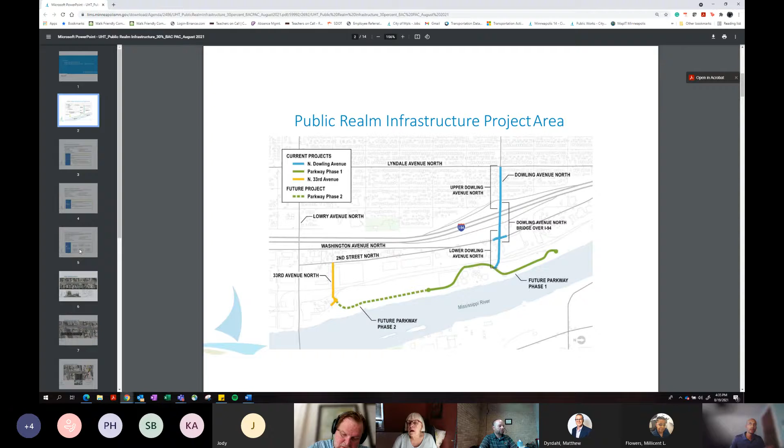I'm going to skip the engagement slides because I kind of just talked through that. Those are there if you want to review them. You all have this presentation. I'm just going to hop into Upper Dowling.

So this is kind of the first piece of infrastructure. We call it Upper Dowling because it's on the western side of the bridge. It's at a higher elevation. This is the intersection of Lyndale Avenue North.

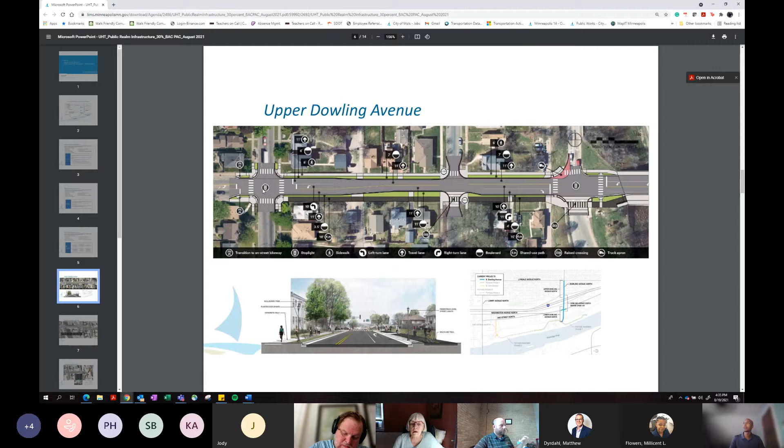You can see that we have a shared use path treatment on the south side of the roadway, 10-foot width. We have 2 vehicle travel lanes. This says 11, they're actually 10-foot travel lanes, so I apologize for the graphic error. Tight timelines, trying to get things to you as soon as possible, but these are 10-foot travel lanes. We also have a 6-foot sidewalk.

We have some nice boulevard. If you've been out at Dowling now, you know it's face a curb and the sidewalk. There's no boulevard. There's bike lanes in the street and they're just painted on the roadway. This is a high volume roadway, about 15,000 vehicles a day.

And so in those type of situations, we'd like to separate motorists from cyclists, and our design does that. We are sharing that space with pedestrians. The reality is we have a really constrained right of way.

In certain situations throughout the city, when we don't have enough space to separate bikes and pedestrians, we combine them as a shared use path.

This is a similar treatment to what's on 26th Avenue North, about a mile and a half south, extending from the Mississippi River overlook all the way to Theodore Wirth Parkway. We're also planning to extend this treatment in the next 10 to 15 years through our CIP cycle as we continue to reconstruct the rest of Dowling, so you'll have a really nice east-west connection across this section of Minneapolis.

We also have a bump-out here, and there'll be a transit pad located here. We have raised crossings here and here. This, which we're working with MnDOT very diligently on, would be the first ever raised crossing on a MnDOT facility, so it's a really exciting endeavor. Chris has really been leading that design and can talk through some of that in further detail. Chris, you want to provide a little context on that?

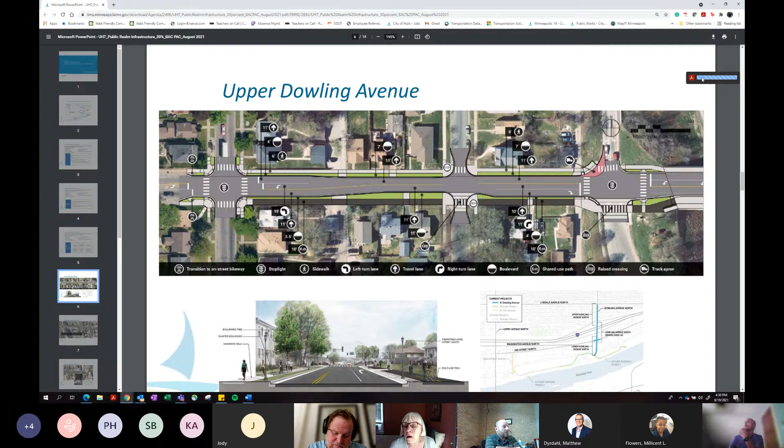Another feature at the ramps, on the north side of the road, you can see that pink area - that's intended as a raised truck apron. It does kind of the same thing: we're attempting to slow down vehicles coming off those ramps and turning onto Dowling, to try and reduce the likelihood of a pedestrian crash at that location. So two kind of innovative treatments we're working through with MnDOT.

Looking forward to what we come up with there. Thank you, Chris. I'm going to slide into the bridge. Does anyone have any questions on Upper Dowling? Okay, we'll keep moving along.

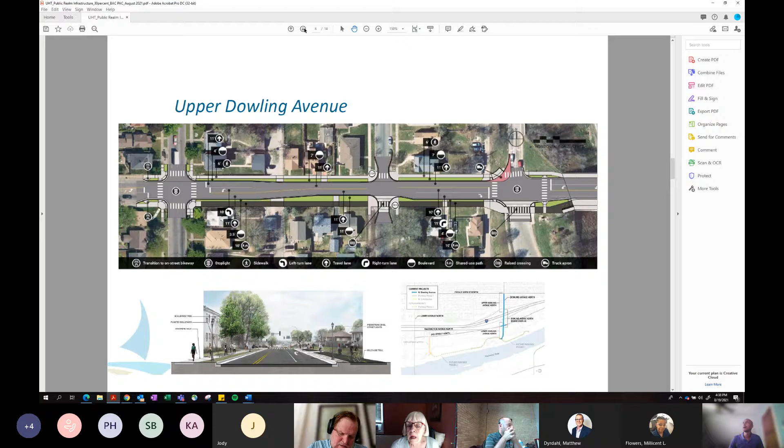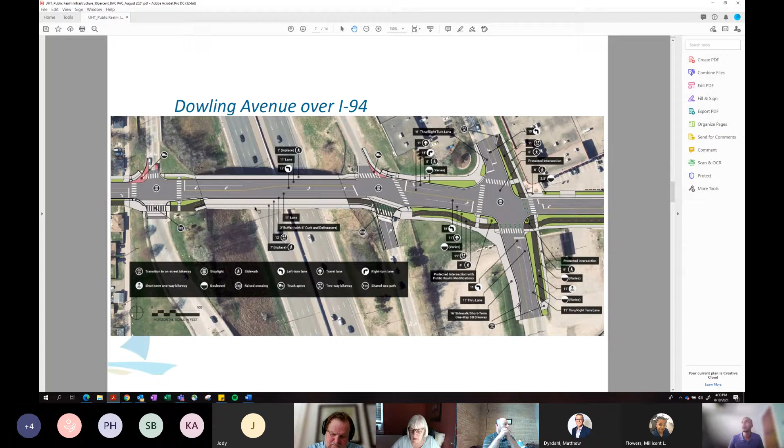So we're keeping the northern sidewalk in place, and we're also keeping the southern sidewalk in place. Those are both 7-foot sidewalks, and we're adding in a two-way cycle track here, on slide 7. This is going to be 12 feet of width. We're also proposing a 2-foot buffer with a 6-inch curb and delineators. This will also be a first on a MnDOT facility.

So as Chris alluded to with the raised crossings, we're also working with MnDOT on adding in that raised curb, because this would be a first on a MnDOT facility. There's quite a bit of design detail to work through, but it's a design that we are recommending and hoping to secure an agreement with MnDOT on that treatment type.

So this is the start of where you begin to see the separation of cyclists and pedestrians. Like I said, when we can, we like to separate them, and in this situation we have the space to do so. So we have a 12-foot two-way cycle track and a 7-foot sidewalk, and this treatment generally continues all the way east into the site and is pretty consistent throughout the parkway as well.

We also have a raised crossing section here on the other side of the bridge that Chris is continuing to coordinate with MnDOT on, and you see this two-way cycle track continuing east into the site.

A few things to note on Washington: if you've been on the northern part of Washington, you know there are one-way bike lanes in each direction, but they're just painted with no physical separation. So we're going to have this two-way bike facility here, and we're actually going to work with the county to repaint this northern section of Washington so they'll have a two-way cycle track on the east side of the road.

They're going to put in bollards and continue that treatment all the way up to Lyndale, to the Webber Camden 44 project, so we're able to connect this facility all the way north to provide more regional connectivity for our cyclists.

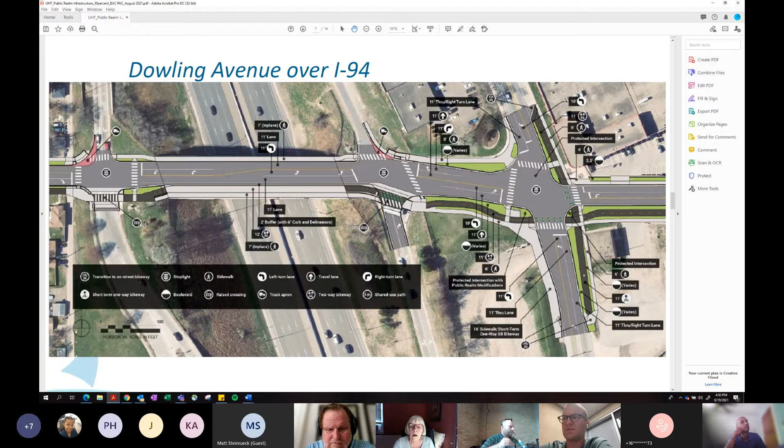That's a really good question. To explain a little more what I'm getting at: whenever we have a crossing, we need a level landing ahead of that for the curb ramp. So if we were to add a second curb ramp crossing the road, we'd need another level landing. The difficulty is getting from that second level landing back up to the bridge while having an ADA-compliant grade in between. To accomplish that, we'd have to do a little zigzag in the entire sidewalk for everyone, trying to get back up to the bridge grade while still maintaining ADA-compliant slopes along Dowling.

If that makes sense—I'm sure it does, but I'm not following it. Are you talking about the south side, the landing there, for example, where the stop bar is?

On the south side, actually, we've got more length, so we have longer room to chase that out. It's really the north side of Dowling where we have issues. So if the stop bar was a crosswalk, the landing area at the stop bar on the north side is what prohibits it—there's enough of a gradient just in that 7 feet or whatever the crosswalk would be.

Yeah, if we were to attempt a second landing for the movement across Dowling, that flat area would make it impossible to get back up to the bridge without doing some kind of circuitous design with the walk along Dowling. That's what we're up against. Okay, alright, thank you.

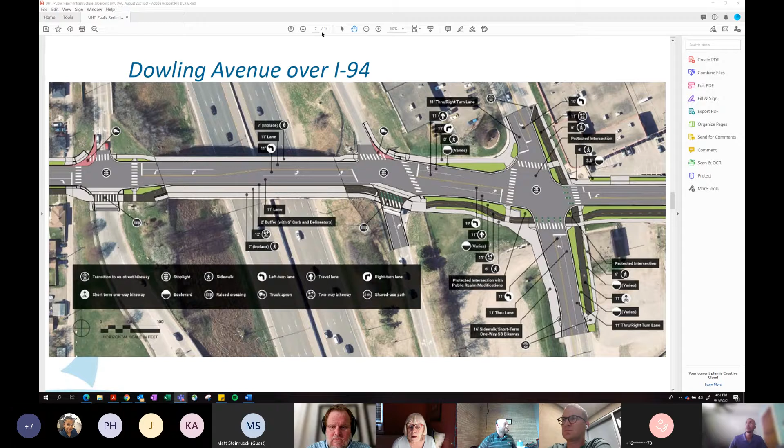I'm going to move on to the next slide, which is slide 8, Lower Dowling. This is just east of Washington. This is the formal entry into the site.

In this you'll see the continuation of the two-way cycle track, some boulevard space, and a sidewalk continuing as well. There are 2 active rail crossings here, with frequency about 4 times a week, so there'll be active gate warnings extending across the roadway and the bike ped facilities.

We have 2 medians in here as well in the roadway, to prevent motorists from attempting to drive into an alternative travel lane to get around the gate arms and bypass the train.

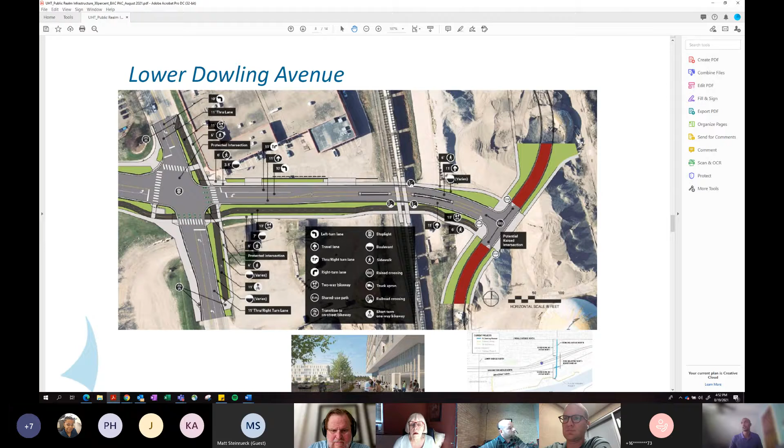We also have the entry into the site, and you'll see a potential raised intersection we're pursuing to really provide design cues to slow vehicle speeds at that critical intersection as folks enter the site.

The parkway extends north and south here - this is the starting point of the parkway. The illustration at the bottom shows that two-way cycle track with some boulevard plantings adjacent to the proposed development.

Does anyone have any questions on this piece? This is the last section of Dowling before we get into the parkway.

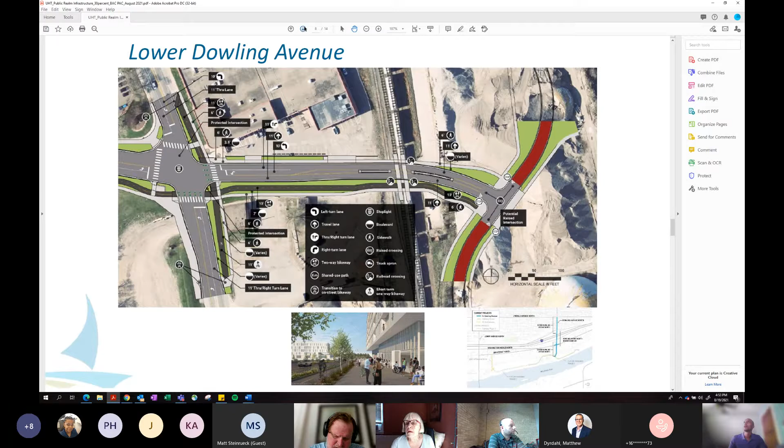Okay, now I'm going to get into the parkway. I apologize, the slide order is a little off - I'm going to come back to 33rd because I know this is a really popular discussion piece at our last meeting. So I'm going to go into the parkway and then we'll come back to 33rd.

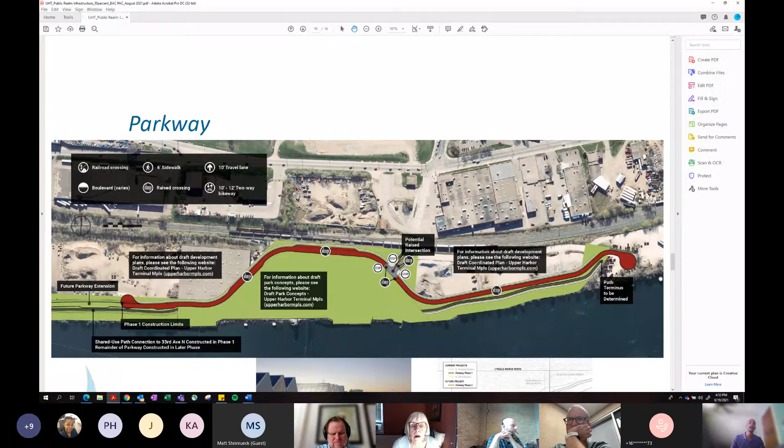So we're on slide 10 now. If you have the deck, you should be on slide 10. This is the parkway - this is the raised crossing, and then we're entering into the parkway. The color is a little more red than you'd typically see, but when it's actually implemented, it'll resemble that red granite chip seal you see on all the parkways in the city.

We're going to have 10-foot travel lanes in each direction. You'll see a sidewalk that continues, a bike trail on the south side, and then a trail as well. This will continue through the park.

The park board just has not finalized their concepts for the parkway or for the park yet, and so we left this area a little blank just because we're still waiting on that process. We're a little ahead of them.

There will be parking within the parkway. We haven't finalized that number, but it's going to be something in the couple dozen range at these little park bays you see along the parkway. Typical with a lot of the parkway facilities in the city, but still a very low parking volume.

This concludes phase 1 right here, which will be right adjacent to the concert venue.

We're also working with Metro Transit to ensure that the parkway can accommodate Metro Transit buses for layovers, turnarounds, and stop locations. It's an ongoing discussion in terms of where they will actually be, but we've been very engaged with them so that when transit does come to the site, it's already integrated into the design and we're not having to backtrack things.

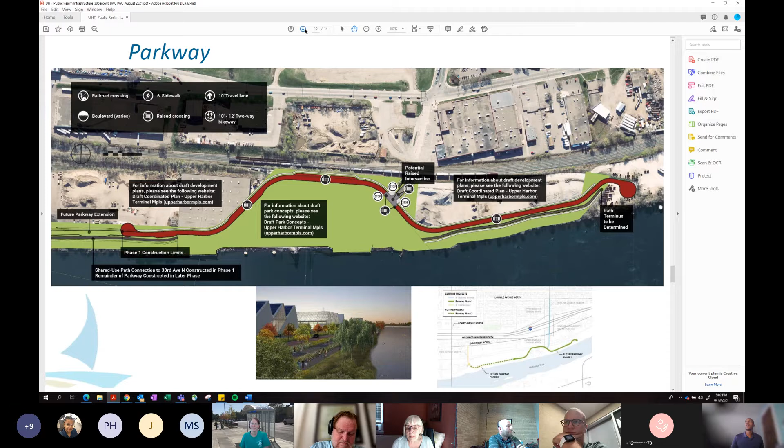All right, I'm going to skip to slide 9, 33rd Avenue. Slide 9 in your deck. I apologize for the order confusion.

This was a pretty controversial topic when we last met with you all. We showed you just 33rd because we knew we wanted to get feedback from you all. We had two options: one was this option, and then one was without a sidewalk. So this option has the sidewalk.

It also does expand the roadway width. The original design we had was more narrow. We went out there and physically painted the roadway and kind of saw what was occurring, and we just realized that it really wouldn't work.

So the effective roadway width here is 32 feet. That is the same as the effective roadway width today when the south side of the street is parked with vehicles, which it normally is. So the effective roadway width remains unchanged relatively.

What is changed is the addition of a sidewalk on the south side. There was no southern sidewalk. What is new is the addition of a shared use path on the north side. There are no bike or ped facilities on this entire stretch. So this is what you see here.

There's also a roundabout here to facilitate vehicle movements. This was a challenging design. There's a lot of vehicle activity. There's no bike ped facilities. It's a really constrained right of way. It's the only option we have for a secondary access to the site. So it's challenging, I'm not gonna lie.

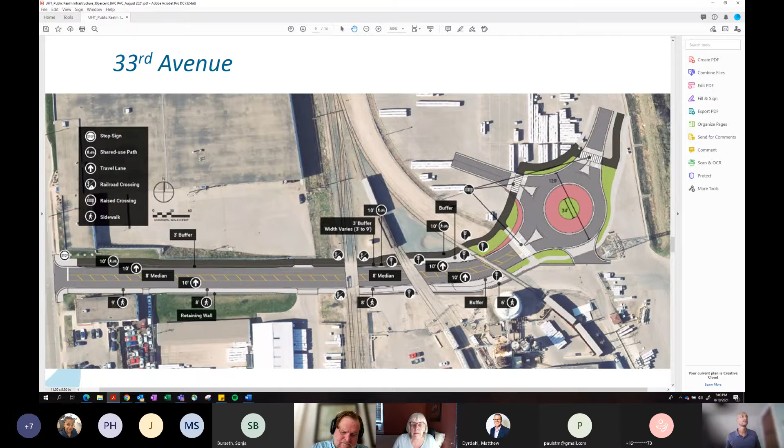Next up, we have Minnehaha and 50th with Madeline Hudick from Minneapolis Park and Recreation Board.

Hello. Like Jody's got the presentation up. Jody will be presenting this evening. She is working on the project with me. Okay, I'll hand it over to Jody. Thanks, Madeline. Hi everyone, I'm Jody Rader. I'm with HKGI, and we are working with Stantec along with the Minneapolis Park and Rec Board on Minnehaha Parkway Regional Trail implementation projects.

So today we'll do a quick introduction and then go over a quick overview of the master plan that was recently completed for the full parkway, and then we'll get into the primary project area, which is the intersection improvements at 50th Street and Minnehaha Parkway, and then talk about next steps.

So like I said, I'm Jody Rader, a landscape architect with HKGI, and we also worked with the park board on the master plan process. And then we have Madeline Hudick, and is Carol on the line as well? I don't. Oh, we also have, I'm Carol here. Yep, I'll be taking notes today. Awesome, also from the park board. So Madeline and Carol, if I miss something, please just interrupt and jump in. I can't really see your faces.

So we'll quickly go over the master plan process. The Minnehaha Parkway Regional Trail Master Plan was completed in November of 2020. This process started in April of 2018, and we had a pretty robust community engagement plan and implementation throughout the planning process, with quite a few options for online engagement. We also had a community advisory committee where we held a dozen public meetings, as well as a number of open houses, MPRT in-houses, web surveys, neighborhood meetings, site meetings, et cetera. So we feel like we had a pretty robust community engagement process throughout the plan. Right now we're working on implementation of some of the initial projects identified in that plan.

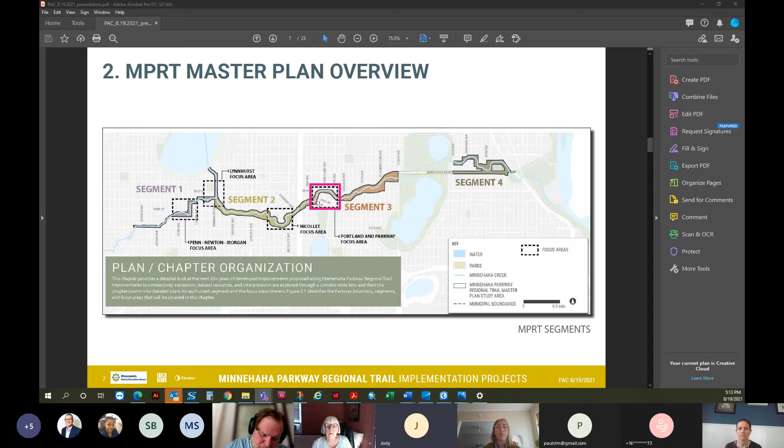In this area, we collected quite a few comments throughout the engagement process about the state of the trail, sight lines, and ability for people to cross roadways. There was a lot of concern about safety for pedestrians and bicyclists, especially at Portland and the Parkway and at 50th Street and the Parkway, where the Parkway bends around a corner.

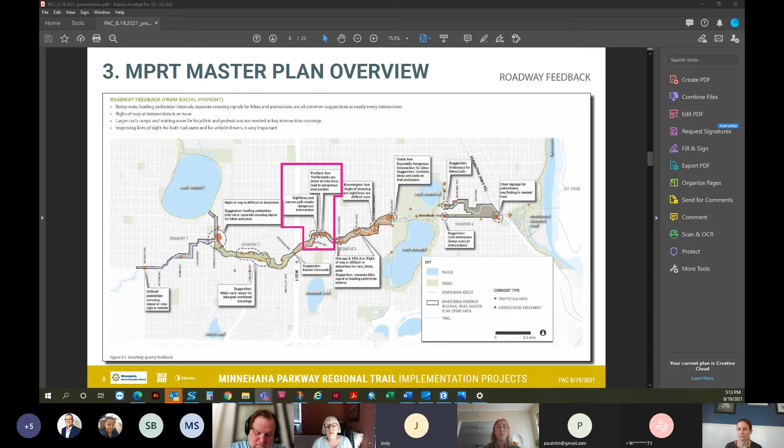About two-thirds of the way through the planning process, it became apparent that we should pause and engage a traffic study in order to get a more accurate count of pedestrian, bicycle, and vehicle movement throughout the study area, and to model some ideas about potential improvements.

At this particular intersection, we looked at what the outcomes would be if a 3-way stop-controlled intersection was constructed here. Today, there's only a stop sign for eastbound traffic coming off of the 50th Street Bridge. If you've ever used the Parkway, you probably know this intersection well, because it's dangerous, and there are a lot of near misses because vehicles don't necessarily understand who has the right of way and when to stop.

So this traffic study modeled what it would look like if this intersection had a 3-way stop, and the outcomes showed that with the combination of the traffic lights at Portland Avenue, there would be some backup of traffic along the stretch, but it would not be an adverse effect overall. It was recommended through the planning study to move forward with creating a 3-way stop here.

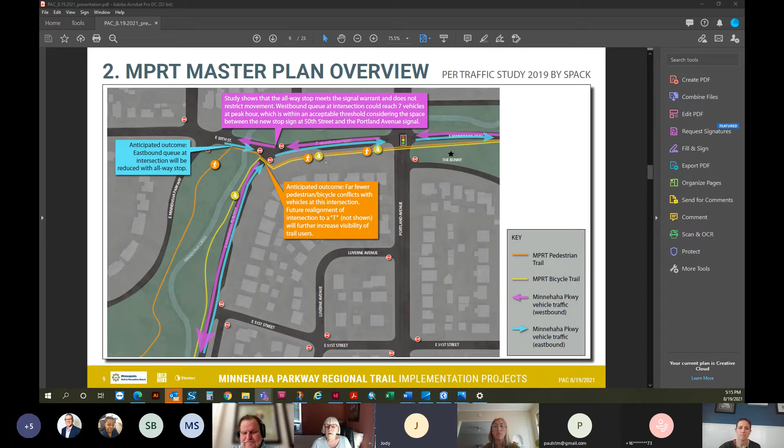This is the master plan of this area that includes the 3-way stop at that intersection, as well as showing a realignment of the roadway here to better tee up the intersection. I just want to note that the pedestrian path for the parkway is in orange, and that continues across this intersection, across the bridge, and then the pedestrian path is on the west side of the creek here.

The bicycle path is shown in yellow. This is a shared use path between Portland and 50th Street. After crossing 50th Street, the bike path splits and goes south along the east side of the creek.

There were many other projects identified in this area: some bank stabilization, other sidewalk improvements, curb extensions, looking at potential realignment of some other intersections, and integration of medians. Also looking at some opposing one-ways to curb some cut-through traffic that happens along this north leg of the parkway.

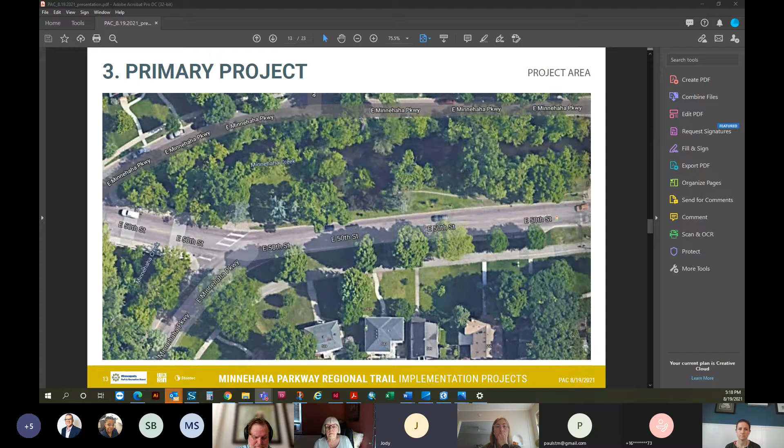This is the project area. I just threw these slides in here in case we need to come back to them for reference during discussion. This is the intersection that I'm sure most folks are aware of if you've ever used the parkway. This is looking west towards 50th Street, and the parkway bends to the south here.

The pedestrian and bicycle crosswalk is here. Obviously folks are using this north side of the parkway to get to where they are going, and there's not a sidewalk there today.

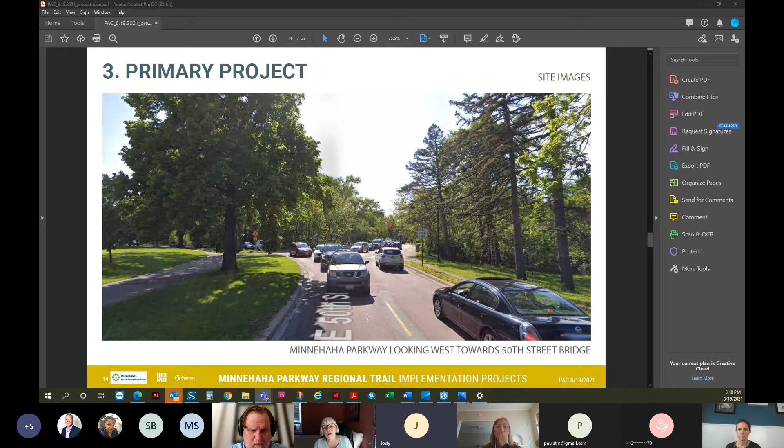Another view closer in of that intersection. A little bit further south along the leg of Minnehaha Parkway, you can see the sidewalk along the east side and the bike trail along the west side.

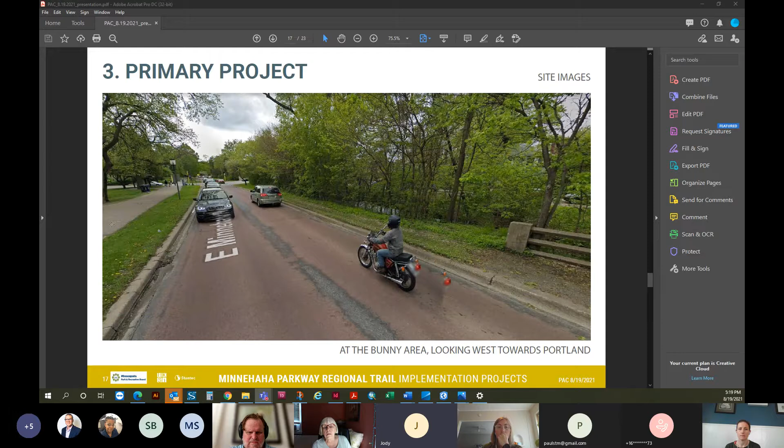Just another view a little bit further east, the bunny statue is to the left here off screen. So our project goals are to improve the visibility for all trail users, improve the safety of trail users at the intersection, and address legibility of the intersection for drivers.

Some of the project components: realign the south leg of the intersection to T into the east-west roadway. There's a plan on the next slide. Design this for a future 3-way stop controlled intersection, expand the pedestrian curb ramp areas at crosswalks, upgrade the crosswalk markings, and widen the trail segments to match the master plan recommendations.

Throughout the parkway, we'd be looking at a minimum of 12-foot width for shared use trails and a minimum of 10-foot for bicycle trails. Again, these are minimums. Other considerations: we want to preserve as many healthy, mature trees as possible, and this area has a lot of them. We'd like to maintain existing on-street parking if possible, although that's probably the least of our priorities. We also want to limit the disturbance of adjacent front yards, though that's maybe less of a priority given there's a good amount of right-of-way.

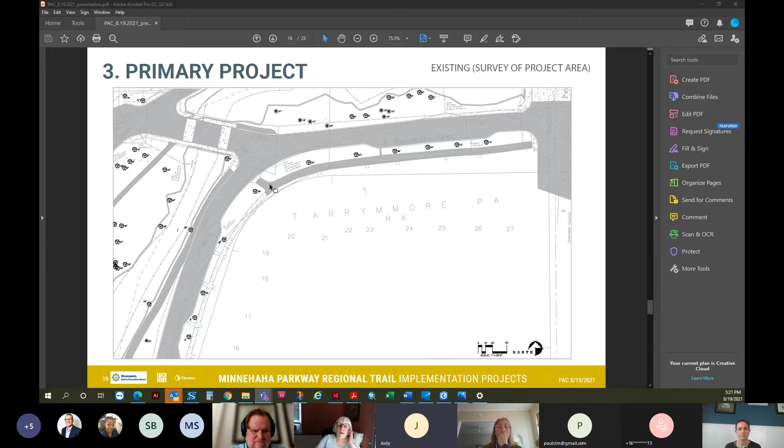So this is the existing survey information. You can see the geometry of this roadway is really not conducive for vehicles both seeing pedestrians at the crosswalk and stopping for them. There's some existing parking bays here, and then here's that bike path that kind of dives into the back of the curb and then widens back out. This is a shared use path, and then it transitions to a sidewalk pedestrian path to the south.

At this point in the design, we're looking at teeing up this intersection, realigning the south leg of the roadway, and maintaining a 24-foot width here and along this section of the roadway. That gives us some room to bump out the curb and create a wider landing for pedestrians at the crosswalk.

We're trying to work in a wider curb ramp and waiting area here. We're a little constrained because the bridge abutments begin right at the edge of where this curb ramp is, and this is actually a historic bridge, probably not slated to be replaced anytime soon. So we're working within the site constraints to make this area as large as possible.

We're also looking at, with the realignment of this roadway, pulling back the bicycle path here, giving it a more consistent separation from the roadway, and more width to be consistent along this stretch. We got feedback from the Bicycle Advisory Committee that a lot of pedestrians end up using this stretch of the trail, so we might want to increase the width here as well.

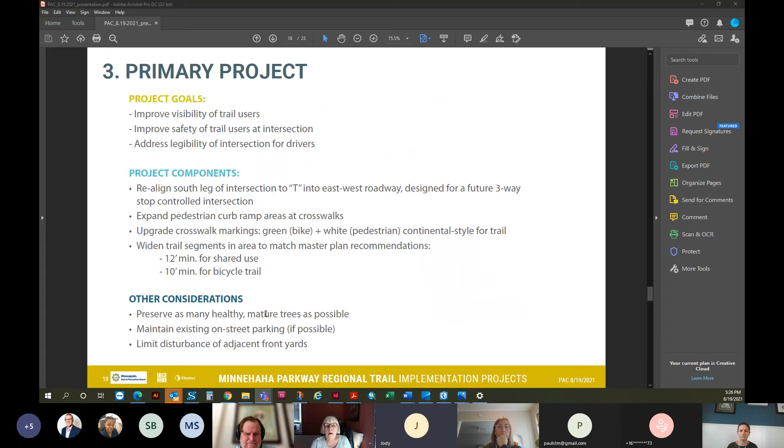So I'll stop there and open it up for discussion, unless Madeline or Carol have anything to add. Nope. Awesome.

I have a quick question. You're at 30% right now in your design, schematic design. Will you be wanting a resolution from us before you finish the design process? And will you be coming back if there are major changes to this? Those are my questions.

Yeah, I think so. We're at the 30% milestone and wanted to get in front of this group, but maybe we're closer to 20%. So semantics there - the scope of the project is a little dependent financially on a few other projects around it, and we haven't dived in super close to the details. As far as whether we need to come back to this committee, that might be more of a question for Madeline or Carol, or as far as a resolution needed, I'm not sure I'm the right person to answer that.

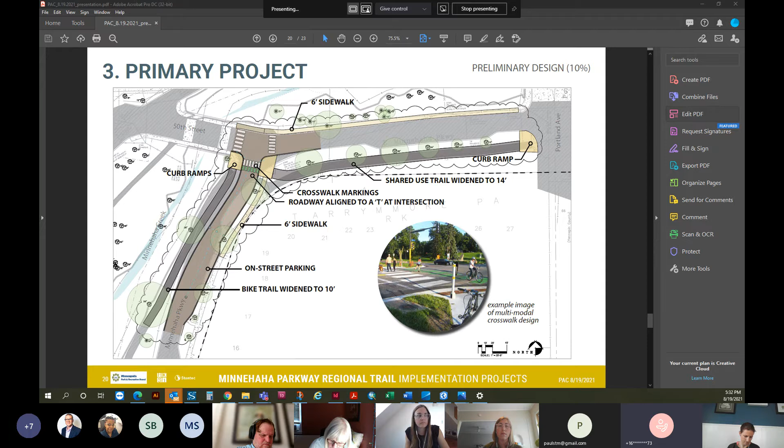I just finished reading the IPCC report and seeing the way increased frequency of really high precipitation events impacts stormwater management. I'm curious where things are at in looking at projects to really design for what we've already locked in, as well as reducing emissions. If you have anyone to talk to more, to find out what the city's doing and how we can support it as the PAC, do you have any thoughts offhand, or could you share them with us in the future if anything comes to mind?

Yeah, I think on a really high level, the fact that the master plan was completed in a joint partnership with the city of Minneapolis and the watershed district speaks volumes to the commitment of all three agencies to really address water quality and water volume in this area. On a more specific level within this project area, we're looking at whether it makes sense to integrate improvements here at the 5th Avenue outfall and coordinate with some of the other outfalls in this area to accommodate changes in flow that we're seeing more regularly with the creek. Also, the overall creek project and master plan address quite a bit about stormwater management and the anticipated changes we see with climate change in the creek corridor.

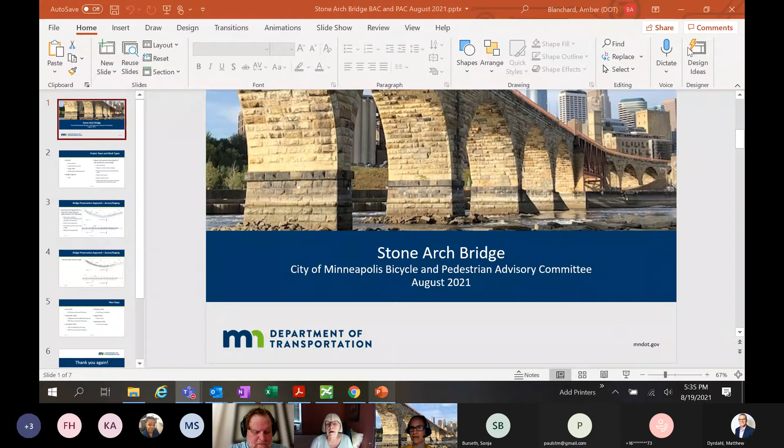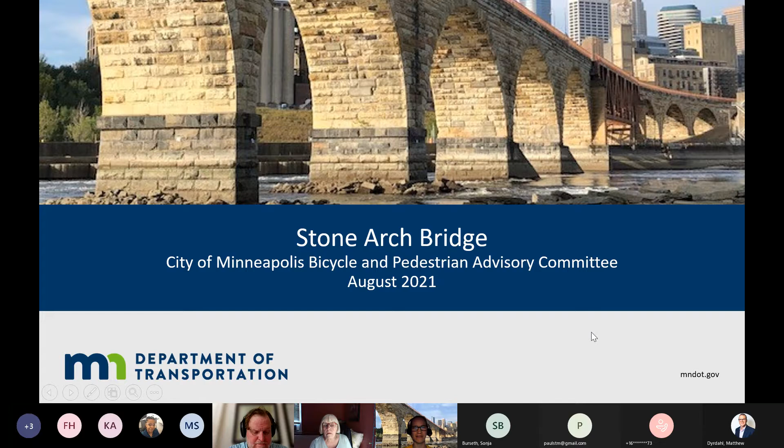Okay, thank you. Good evening, and thanks for having me today. I'm going to share a very brief presentation on the Stone Arch Bridge. My reason for coming here is to inform you all about the recommended staging plan that we have and get some feedback from you on that. I visited the Bicycle Advisory Committee just last week and talked with them about this, and I'm anxious to present this to you all today.

So just to give you a little background, we've got a good project team working here, including the MnDOT Metro District, which I'm part of, the Cultural Resource Unit, which does a lot of our historic work, the MnDOT Bridge Office, and an architectural historian on staff with the consultant MacDonald and Mack Architects. Our bridge engineer designing our repair work is LHB out of Duluth. What we're doing for the bridge is really working to repair and maintain the integrity of the bridge itself and the stonework, so we're doing full repointing of the existing mortar.

We're going to be doing some repairs to minor stone cracking, and replacing any of the severely deteriorated stone that exists on the bridge. No more than 20% of the stone on the bridge will be replaced, and likely it will be less than that. We're also going to repair the weep drains that are existing out there, as many of those areas where the water comes out has rusted or broken and fallen to disrepair, so we want to repair those and get them away from the stone.

We're going to also be repairing the metal tie rods that go transversely into the bridge. You can kind of see them on the faces in some cases, so we want to repair those ends. And then lastly, we're going to be repairing, and if necessary installing, any scour monitoring system and the breakwater protection on some of those piers at the base as well.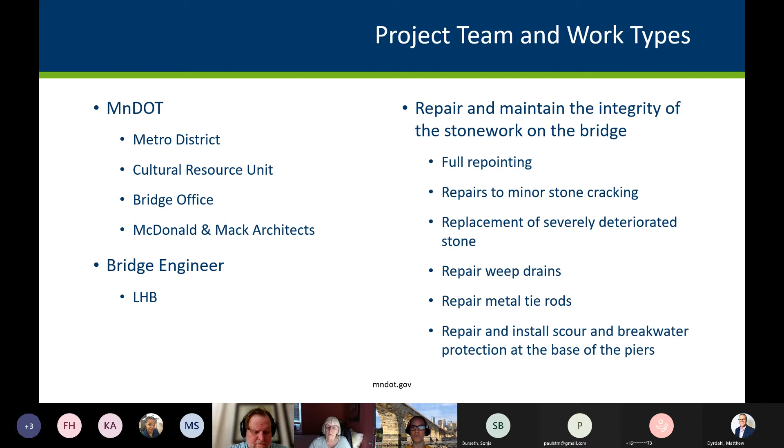So, here today to get some information from you all and reactions as to our access and staging plan. This is a very long bridge, and we are recommending staging it half at a time, which means we want to basically block off about the middle of the bridge, around where the truss span is. What we want to do is block off there. Bicycles and pedestrians can still come to that truss span, look at the river, look at all the buildings, and then they'd have to go off the way they came.

So in this case, our first stage would be we would block off the east half, essentially from Father Hennepin Park and the cul-de-sac over there on the east side, to the east part of the truss span. The reason for that is we want to make sure there's a turnaround area for emergency vehicles that's wide enough for them to turn around in, and we feel that the truss span offers that opportunity for them.

And then what we're going to do, and I'll show you this in a minute on the next slide, is we'll reverse it, and then people will have access from the east side to the truss span, and they'll have to go back the way they came on the east side.

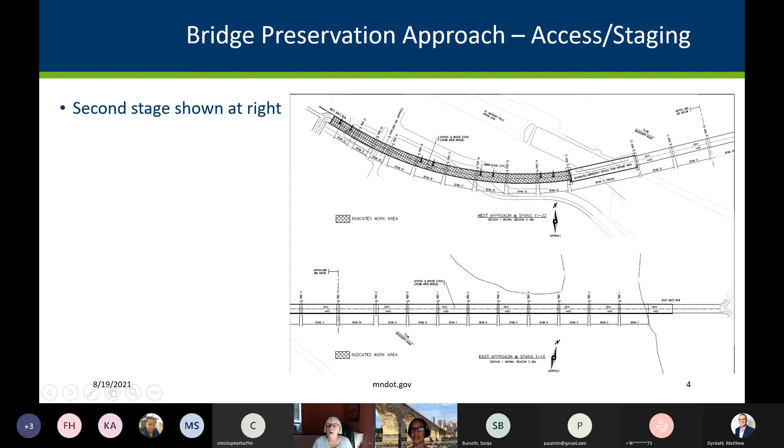As you can see here, it's much more the bridge in this case. They have got a much larger stretch because we'll be able to finish that work first and allow them to come on the east side and go back that way as well.

Just to give you a little update on where we're at and what the next steps are: in June we had our 30% plan deliverable submitted from our consultant, and that is all done now that it is August. Upcoming in September, we have engagement with neighborhood groups and businesses on this topic, and want to get their feedback on the proposed staging that I just showed you. We also have our 60% plans submittal coming up at the end of September.

Then in December, our CRU, Cultural Resources Unit, along with McDonald and Mack, will have another Section 106 consulting party meeting. They've had one already back in March, and we'll have another coming up in December. Also in December, our 90% plans submittal is due. Then all of our plans and submittal memos need to be turned in and ready for the advertisement.

So that we can get the contractor on board by February 2022. Then in August of 2022, about a year from now, we will be receiving bids from each of the contractors and deciding which one will be awarded this project. We're anticipating construction will begin that fall, in September of 2022. At this time, I just wanted to see if there's any feedback on the way we are recommending the staging and access take place from the contractor side, and I'll open it up for any questions and feedback.

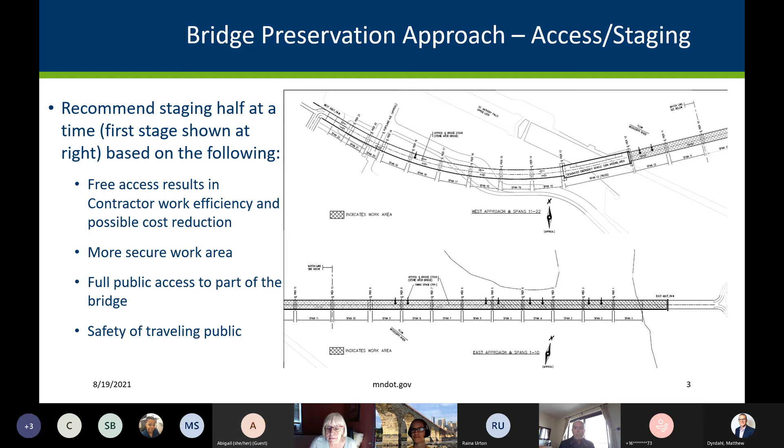You bet, thank you. Next up is Forrest Hardy from Minneapolis Public Works on 37th Avenue Northeast, and also K.C. Atkins from SEH. Thanks, Barb, this is Forrest with Public Works. It's been a while since we've been here with this project, and we have some updates based on trying to get pedestrians to and from our trail facility, which is some feedback that we heard at the BAC, and various other updates to share with you guys. I think you saw an early schematic last time, but I'm going to give it over to Casey Atkins to walk through the layout. One quick question, Forrest, are you guys looking for a resolution from us for this project? Yes, we would be looking for a resolution from you. All right, thank you.

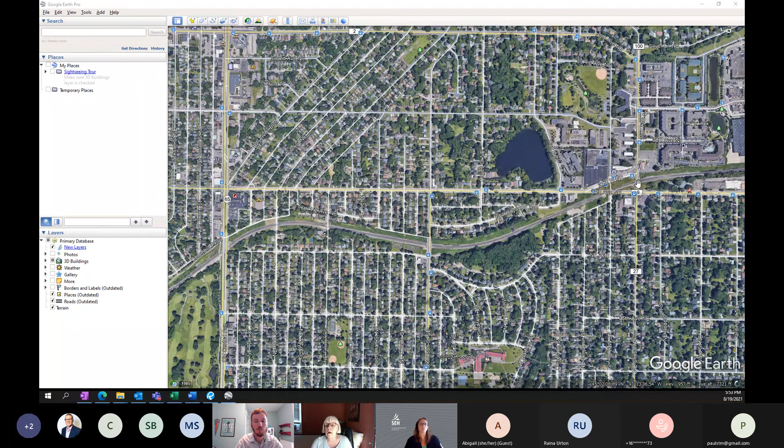All right, thanks Forrest, I'll share my screen here. Just to give everyone a quick high-level overview of where we are talking about, we're looking at 37th Avenue Northeast, from Central Avenue on the west side, all the way east to Stinson Boulevard, across the railroad tracks. So with that, I will dive into the layout.

Working our way from the west side to the east side, starting at Central Avenue. We're looking at redoing the curb ramps in this location, as well as solving a couple of issues here. Number one, there's a crash problem in this location, especially with motorists trying to go around left-turning vehicles, or left turns into pedestrians or bikers along the roadway.

That's one of the reasons why we're adding a left turn lane. The existing right turn lane would remain, and we're looking at pulling out those through lanes at Central Avenue. 37th Avenue Northeast is a truck route, so we're accommodating the WB-40 as our design vehicle. Since this is also a MnDOT roadway, we ran the WB-62, a longer truck, to make sure it can make this movement. But that's some of our constraints with this roadway.

Since you've last seen this, we do have that 10-foot wide trail on the north side, with a buffer between motor vehicles and trail users, then our roadway, and on the south side a buffer as well as a sidewalk. Along the roadway we're eliminating parking along the entire length, looking to widen those boulevard spaces for green stormwater infrastructure, which narrows our roadway. The curb line on the south is actually moving north, but overall the center line is moving about 4 feet south, though it will feel a bit further north.

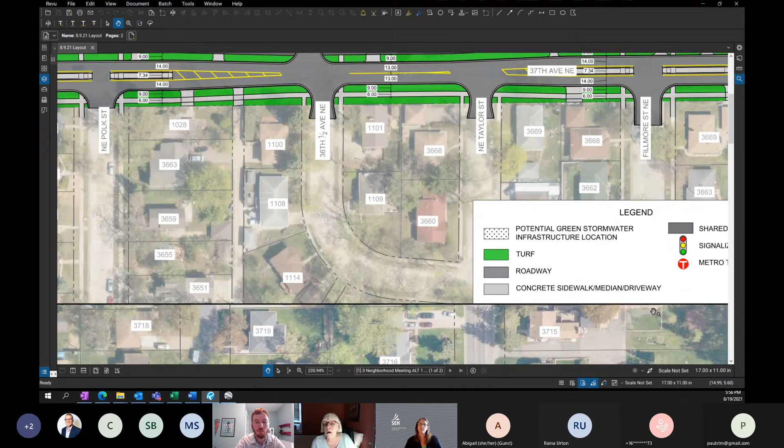Fillmore is one of those streets that crosses the railroad to the south, so we'd anticipate that to be more of a major movement. Polk is one of those connections to the Grand Rounds, which is again one of the reasons why that location has been chosen.

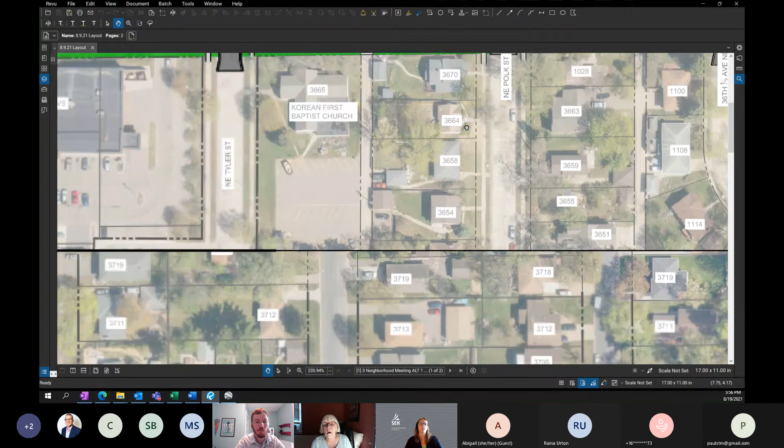Stepping along to the east, Buchanan is another bigger thoroughfare in this location within the street network, so again we're looking at a two-stage crossing here, providing that median refuge island. One thing to note is we're proposing 9-foot wide boulevards wherever we can along the corridor, mainly for green stormwater infrastructure. We're really looking to maximize our space with stormwater treatment along this corridor where we can, and it will also help with snow storage in the winter.

Then we get to Johnson Street, the signalized intersection, where again we're looking to add those left turn lanes. When we add left turn lanes along this corridor, it's really not a capacity issue, it's a safety issue—it provides space for motorists to pull out of traffic, not worry about being rear-ended, and addresses not only motorists coming through but also people walking, biking, and rolling along the corridor. I'll pause here to see if there are any questions.

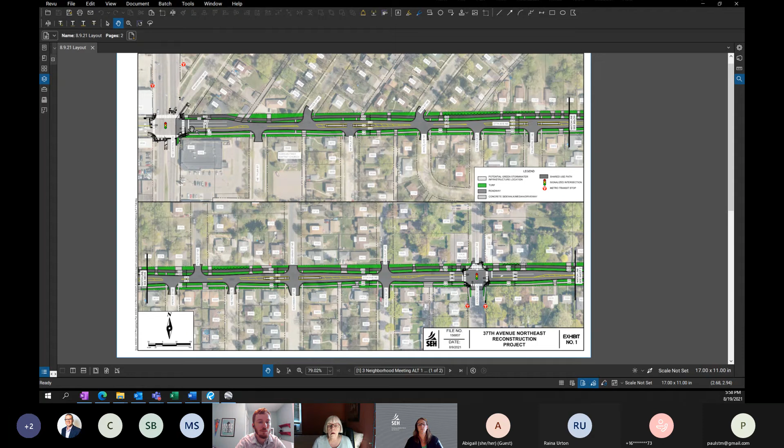I'll zoom out, because this is the first page of that layout and we're about halfway through. One thing I forgot to highlight—similar to the Upper Harbor Terminal project you heard about today—we're looking at adding a truck apron here to slow passenger vehicles around this turn, while still accommodating some of those larger truck turning movements needed for this truck route. Any questions on this piece?

I've got one. I'm hearing you talk about the T intersections as if they are optional pedestrian crossings as opposed to default pedestrian crossings, and I'm concerned by that.

Yep, so we've had a lot of back and forth. This is a Minneapolis and Columbia Heights project with federal funding. We've spoken with MnDOT and looked at where these crossing locations are. On the Minneapolis side there are existing sidewalks, but on the Columbia Heights side we really only have existing sidewalks at Tyler Street and Polk Street. So we've had to navigate this back and forth between the two agencies, as well as some MnDOT review.

We've looked at MnDOT tech memos around ADA ramp compliance. MnDOT Metro, MnDOT ADA, and MnDOT Construction have all reviewed it, and their recommendation is to provide at least one crossing at all T intersections. We also have maintenance concerns, especially from the Columbia Heights side — they've committed to maintaining the trail, and they feel they'd then have to maintain those curb ramps too, and their budget is a lot different than what Minneapolis looks like.

So what we're looking to do is add one crossing at least at every T intersection, and then we've added median islands and two crossings on each side where we can, at some of the more major thoroughfares. This is balancing the needs of each agency as well as the users.

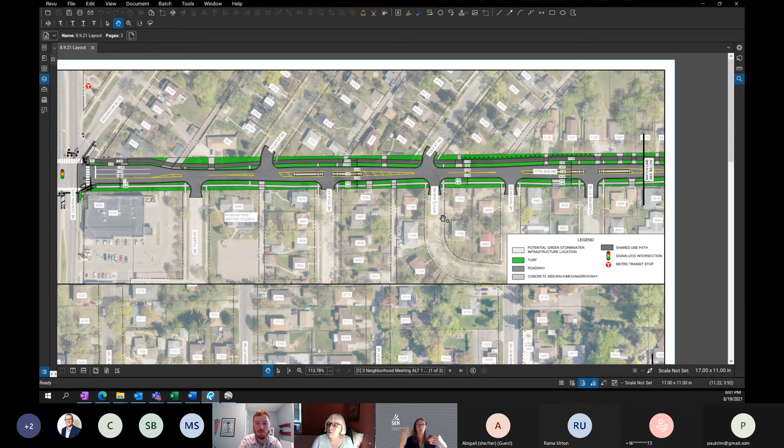Yep, I understand, and we're definitely not making people go more than an eighth of a mile — most of these are actually within just a couple hundred feet of each other. So it's trying to balance that against adding 5 minutes to a trip — if you're an average pace walker, that's 5 extra minutes, and it might be 10 if you're slower. So I don't know if a 5-minute addition, or 2.5 minutes each way, is within level of service standards for MnDOT, but if you can push them harder, I'd appreciate it.

Okay, we can take that back and have more conversations.

So Casey, can I ask a clarifying question? You were referencing MnDOT for guidance, but MnDOT isn't a decision maker on this, right? I think that's important to clarify — it is federal funding, so MnDOT will have to sign off on it, but it's still a city project that would go to our council, correct? I just want that to be clear. Yes, so MnDOT will review it and has to sign off, but ultimately it's a city project with Minneapolis and Columbia Heights.

And I'd especially urge you to follow Minneapolis policy and provide safe, accessible crossings at every intersection. Okay.

Any other questions on the western half before I move to the east?

Okay, I'm going to step down here. As we move to the east, our intersections actually get further spaced apart. We've got some longer block lengths than we do on the west side, and they align a little better as well. We don't have that offset street grid.

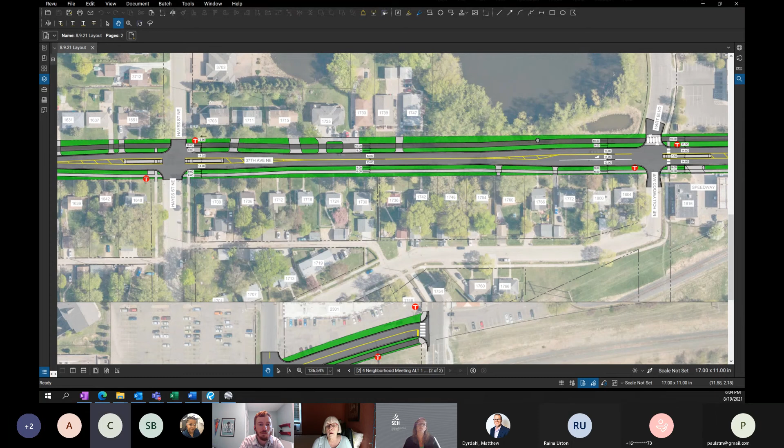At Hart Boulevard, again, we've got a transit stop. This is a future BRT stop anticipated, so we've widened out our boulevard in this instance to accommodate that wider width, again not precluding that BRT coming through in this location. Our median island has extended. We've been working with Speedway just to make sure that their fuel trucks can get in and out of here, and this works well with their movements, so we're not impeding how they're operating with their business today.

And then at 37th Place, again, we are teeing up this intersection right now. It's got a pretty significant skew. We've had a lot of discussions on what this crossing looks like. We've pulled it back to that 16.5 feet based on the best practice of that 2-way bike and trail facility, that allows a left turning vehicle to address a motorist coming through here, stop, pause, and address any bikers or pedestrians or anyone walking, rolling, scooting through here, and then make their movement through.

And again, the reverse movement here: stop, address anyone using the trail, and then come through, be able to queue here and address any motor vehicle. In addition, with teeing this up, this should slow some of that cut-through movement, especially when there's a train coming through here. We are adding a new trail and sidewalk crossing of the railroad.

And then we'll get to Stinson Boulevard, where we'll just make some ADA upgrades here at this location. And the trail, for now, will terminate here. But again, on the future bike plan, there's a trail that's going to be heading south on Stinson Boulevard here, and Columbia Heights is also looking someday to add a trail connection here. There's just some utilities and things with the railroad in here right now that just aren't a part of this particular project at this time.

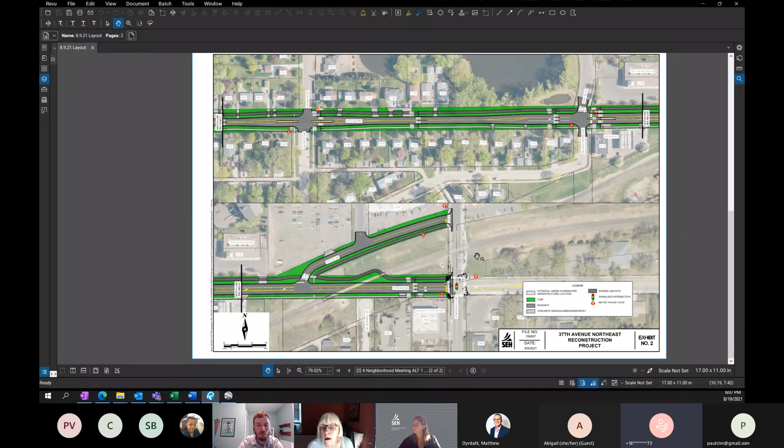Any other comments? Go ahead, Julia. I've got just a little slightly snarky one, but if we could be not prioritizing comfort and ease of movement for fossil fuel trucks and focusing on pedestrians, that would be an awesome bit of local work. I understand all the constraints, but whatever you can do around that would be much appreciated, and thank you for your work.

Thanks, Julia. Any other comments or questions?